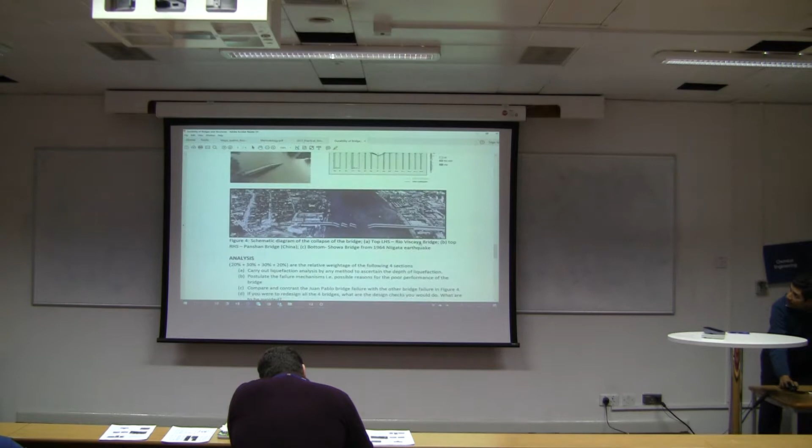So the figures are not very clear, isn't it? What I will do is try to project the figures so that you can read it on the screen. That is the coursework.

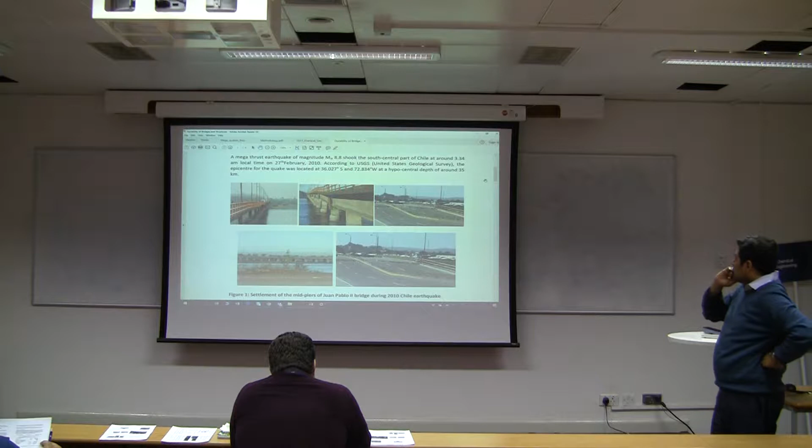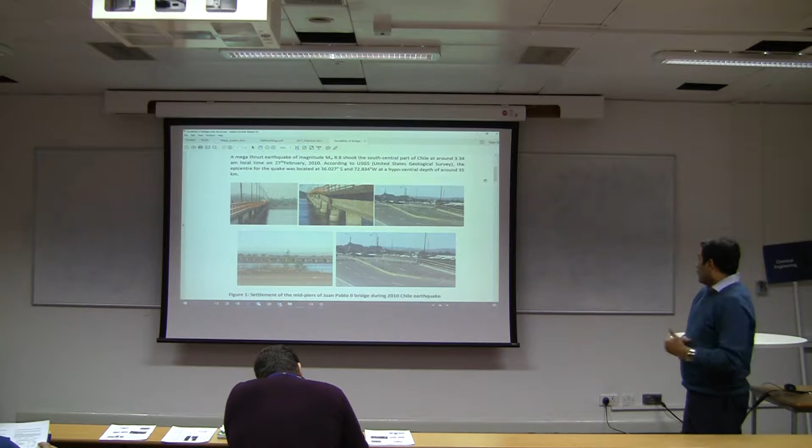Okay, so what you can see here is a bridge. What happened here? Anybody? So the bridge did not collapse, but in some places we had a big settlement. The bridge foundations settled differentially across the whole bridge. What that has done is, in some places, settled by even 1 meter or 0.8 meter.

So is the bridge workable? Of course not, but people can be careful and cross in some places—there's a walkway, it's not a complete collapse. There will be downtime, so the bridge is not operable. Probably it will take 6 months or 3 months, or in some places 2 weeks, depending on the insurance claim and how you procure things. But you can make it work in a relatively short time. You can close some lanes.

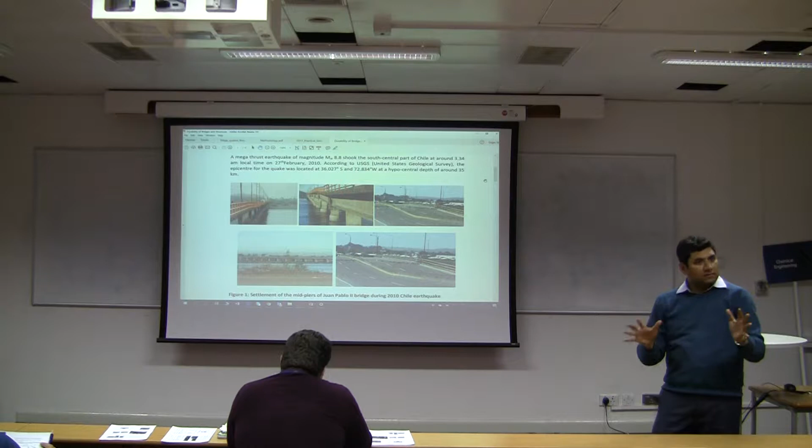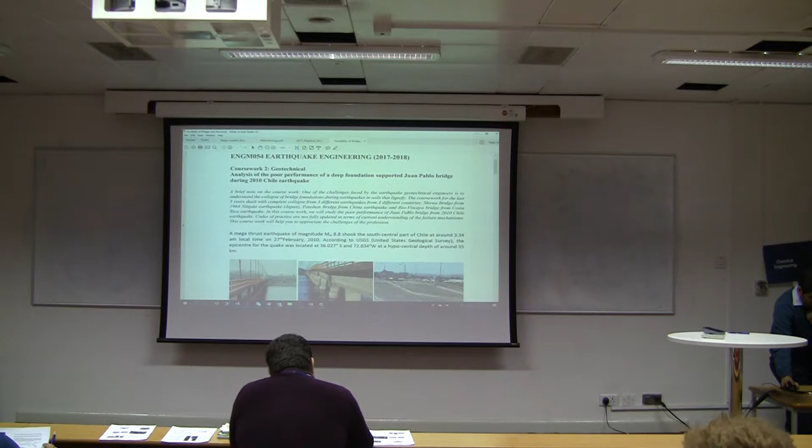This is from one earthquake. This is this year's coursework. But what I want you to do is look at the past 3 years—I gave other failures. They are given here, so you can see there are 3 bridges.

So in this case, will it work at all? Nothing—it can't even be walked through. And this will take a lot more time to get it sorted. They're all on deep foundations, some sort of pile foundation.

So the coursework is about what you should check. As a designer, when you're doing a design, you don't want either of these outcomes.

But in some cases, if you think the earthquake may not occur in the structure's lifetime—there's a very small chance—and if you want to implement all the mechanisms to prevent damage, it might be very expensive. So you might say, well, I will allow for a 1 or 2 week downtime, and allow some damage so that I can easily repair and bring it back.

Say, for example, to avoid this sort of failure it takes 1 million to do the whole bridge. But if you want no collapse plus no settlement—nothing, absolutely safe—it will cost say 4 million, an extra 3 million. But the chance that the earthquake may come in the structure's lifetime is only 5%. So would you spend 4 million, or spend 1 million and take the hit?

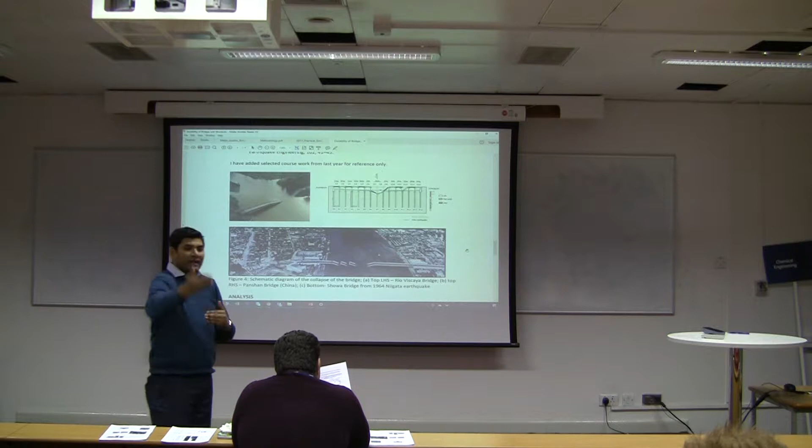And these are known as performance-based engineering—the new way of designing. So do you want a complete collapse, or do you want a certain amount of downtime, depending on things? You might say you don't mind losing the bridge if it fails, because the costs go up significantly to have all these protective things implemented.

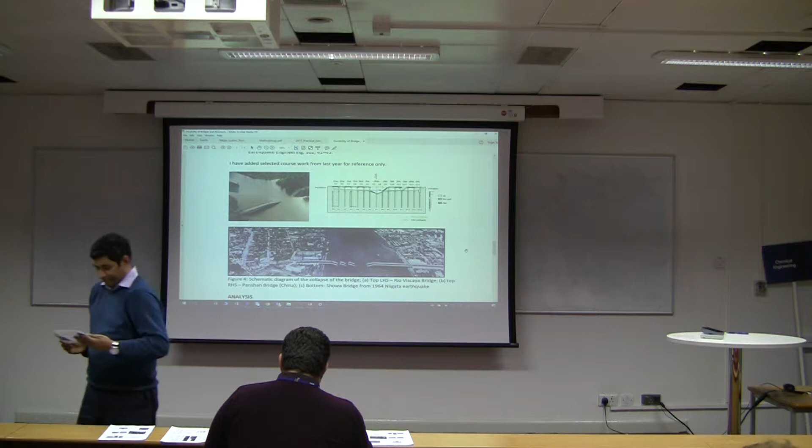Can I just ask quickly, with this layout of the question, to clarify: the liquefaction analysis is with the first case study, and then you're comparing it to the last case study? Is that in question C?

Question C, so is... okay, now what I want to do is give you sample coursework from last years, from the last 3 years, when they've done a good job. So what you can do is compare and contrast this failure with the other failure.

What I just said, we will look here at a complete collapse, and what mechanism governs these failures, and what mechanism is governing the bridge you analyzed. So we can summarize the previous courses given to us, and then compare that analysis.

So what I want, as a learning outcome, is for you to read about the failure, why it failed, for those 3 bridges. Read them, and take in the important things. Write down those mechanisms, and add another mechanism, which is this one. It's more about learning from these failures.

If you look into codes of practice, what do they do? Codes of practice assume engineers can miss out something, so they try to give a prescriptive way of how to do analysis. Often they miss out a mechanism, or don't give everything because it's not properly identified or documented. But these failures can show that even if you follow all the code of practice, why will it fail then?

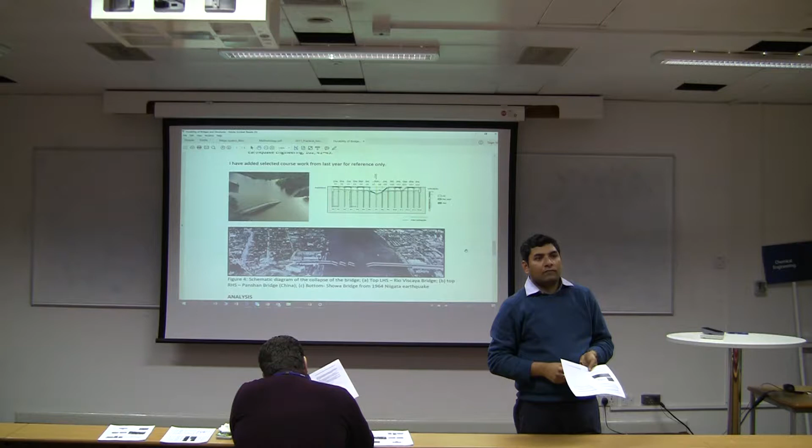Sorry, learn that your technical coursework due date is on the 24th. Is that on a Wednesday? Okay, there are 2 courses - the structure one is due the 1st of May, but the technical one is the 24th of April. Is it given on a Saturday?

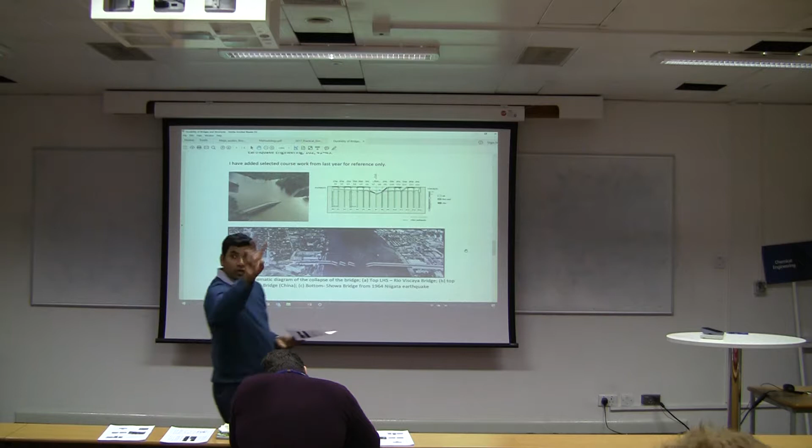Yes. Right, in that case, do we want to do both, or do we have to do both? I can change it... I can change the date to the first of May, or do you want to make it as long as you want? What do you want - change it to the first of May? Yeah, so both due the first of May, yeah? Is that okay?

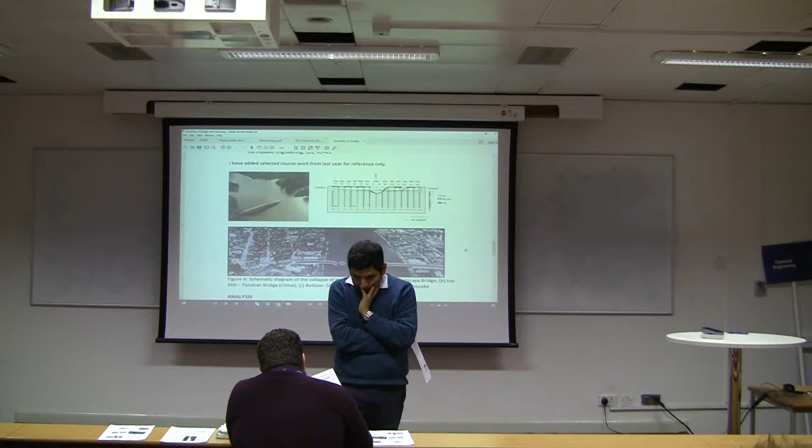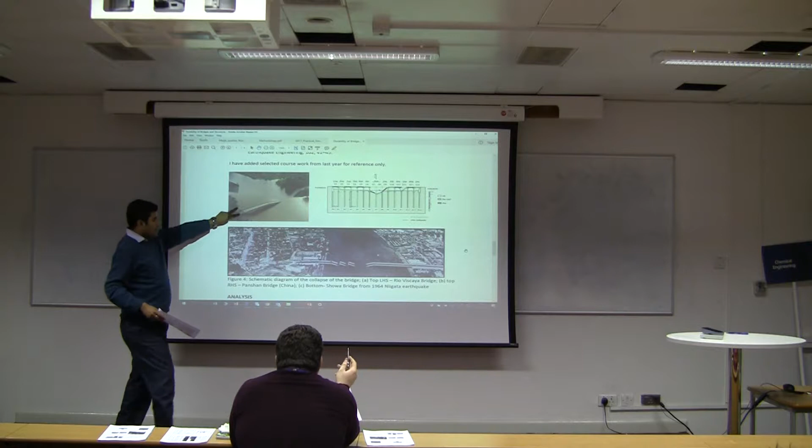Yeah, so there are 3 bridges. One is this one - Rio Vizcaya bridge. This is the Panshan bridge, and that one is the big public one. In terms of the deadline, I was thinking I'll leave it open, as long as it's in the future.

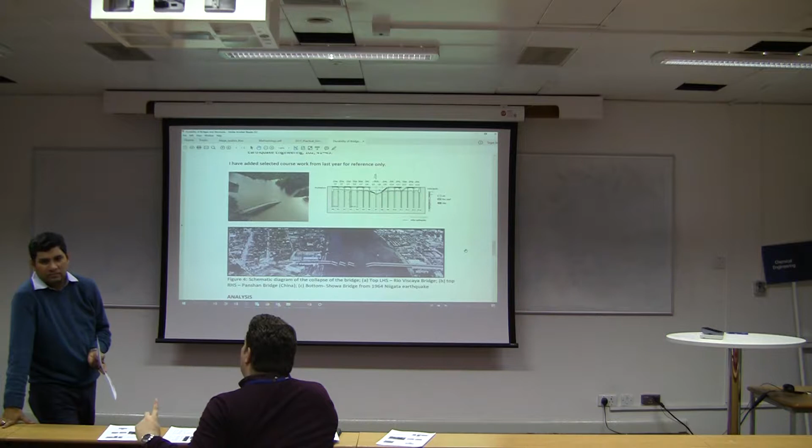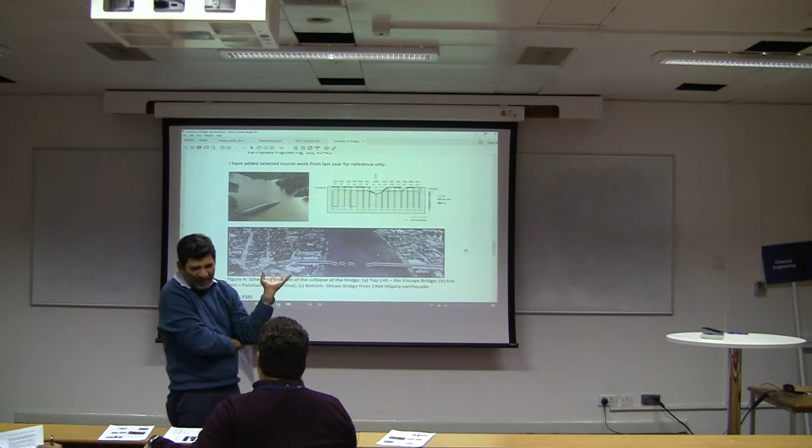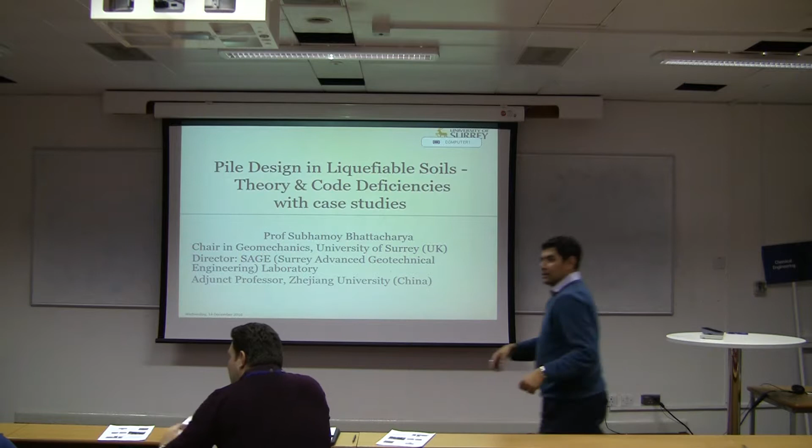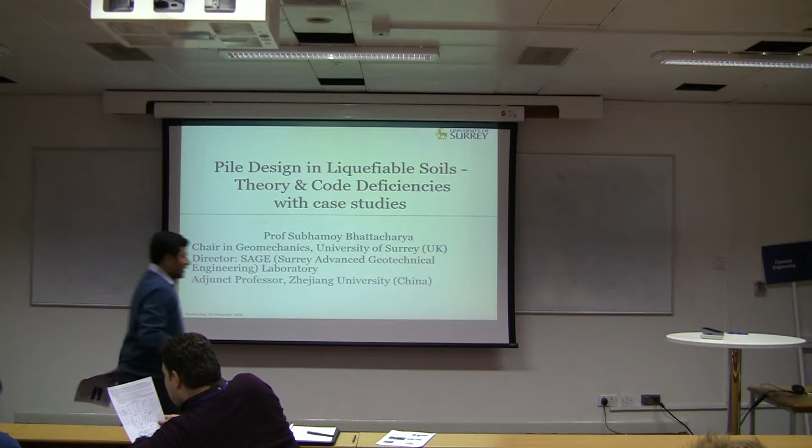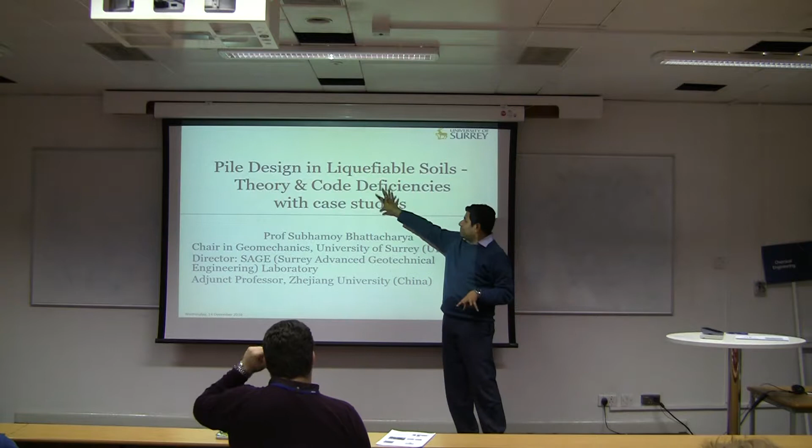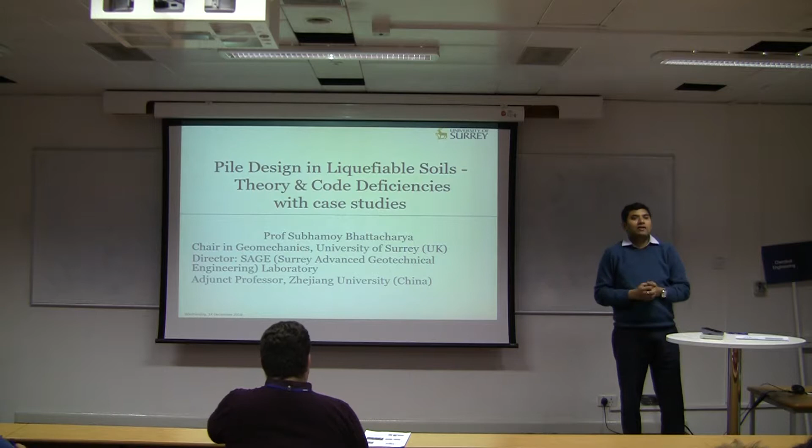You can see here the title, code deficiencies. What I am giving you as a hint is that codes are often deficient. Codes don't cover all the mechanisms, right? And that's the main point about this case study. You will see that the codes somehow couldn't cover this particular case, and engineers followed the procedure and they missed one particular mechanism.

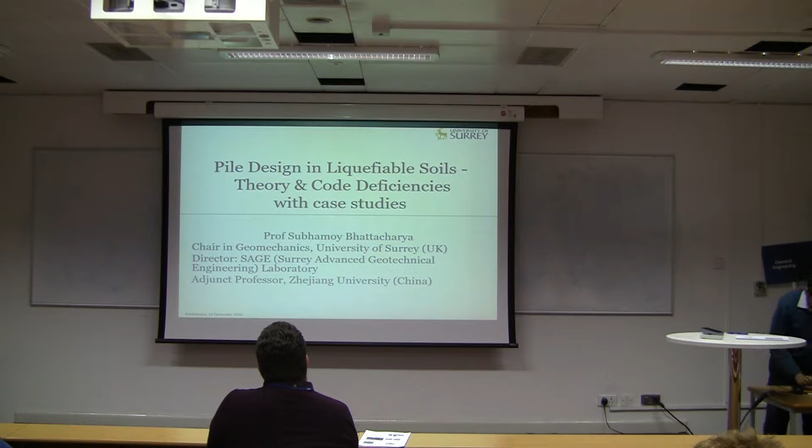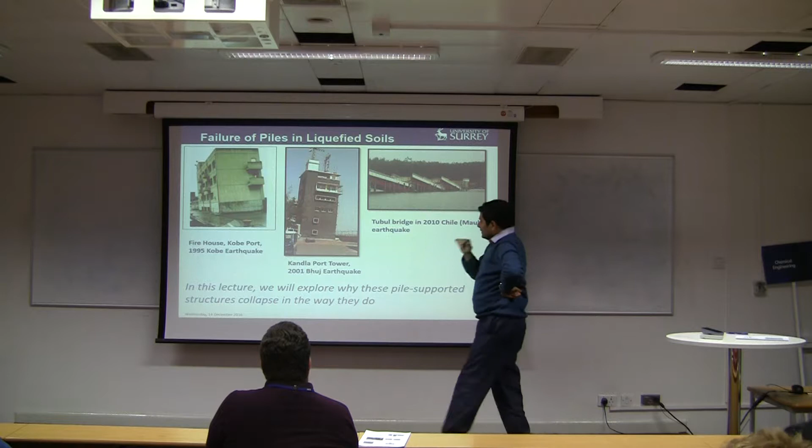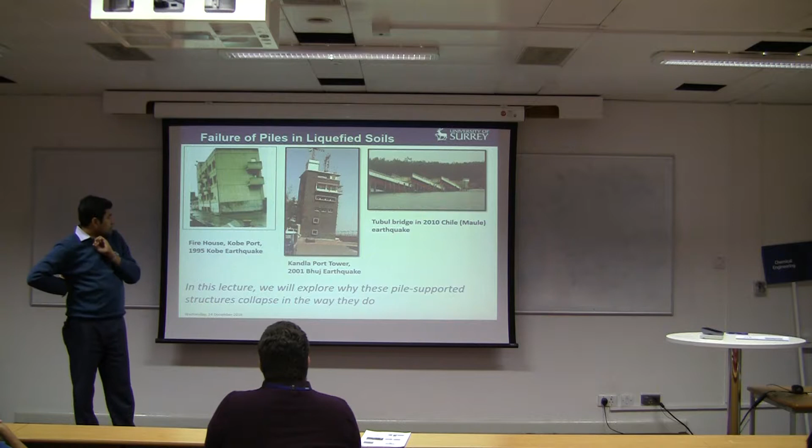Right, so here are some examples of pile failure. What you can see in this case, there is a pile-supported building. The building is intact in both cases, they are intact and pile-supported, and you can see what happened to this building. And here is a bridge on pile foundations. So why do things fail?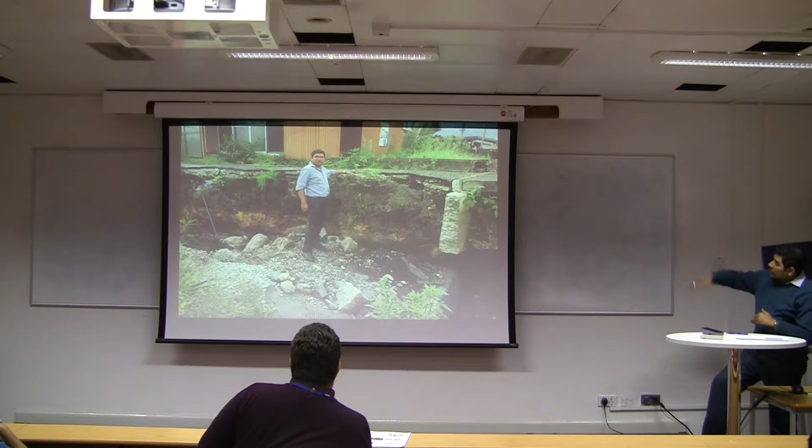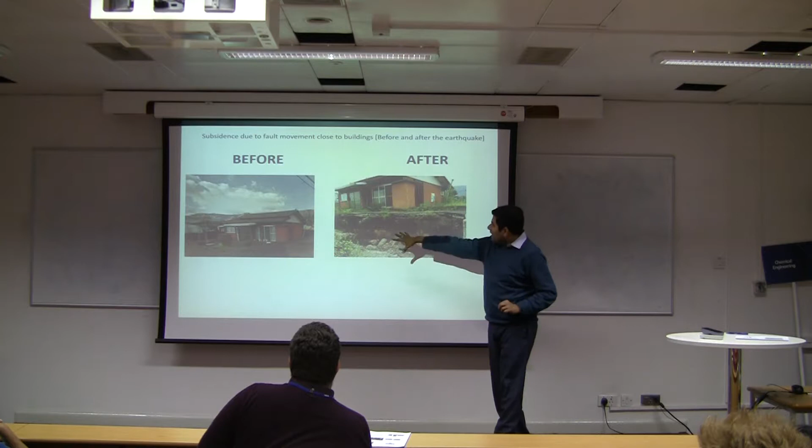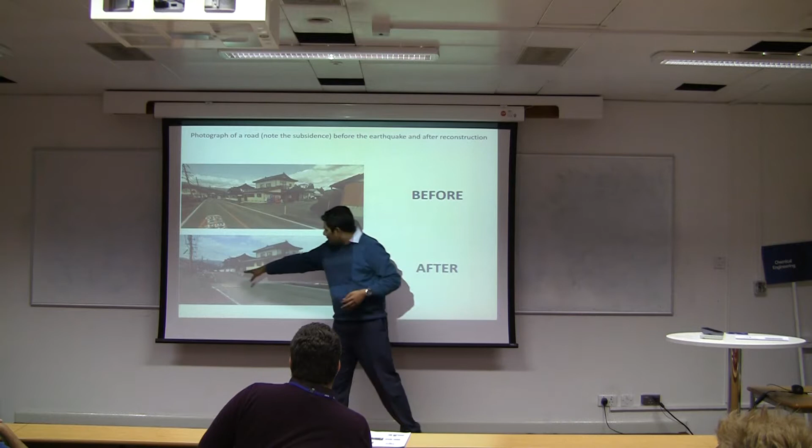Just to remind you, if you have a fault rupture, you can get a big sort of settlement, big ground movement. So this building, what you can see in the second picture, this building narrowly escaped, and the road had a similar fate. But what they did, they put a ramp there and started to operate, because you've got to start the communication, right?

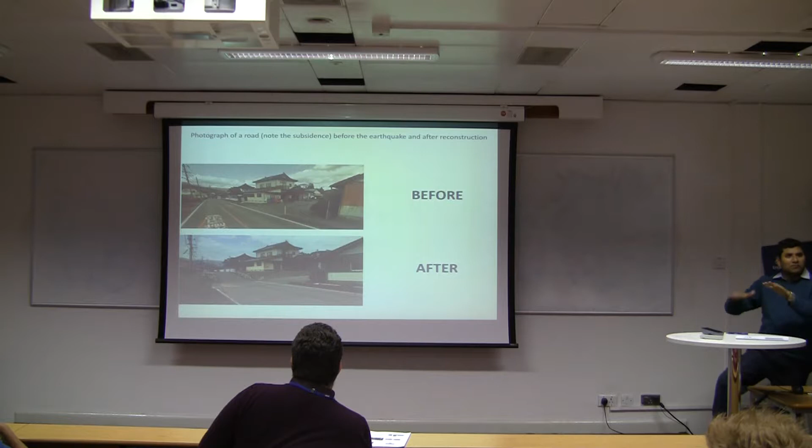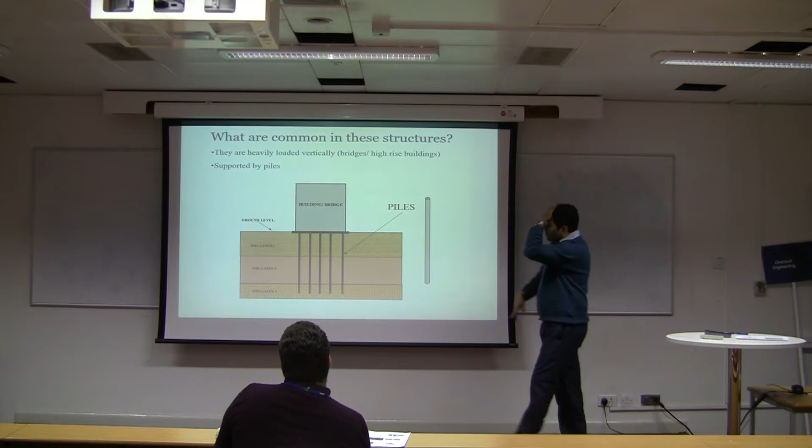So this coursework is something around these lines. You can have some movement and that can cause some difficulties. Now, the problem I was showing you before is all those structures are supported on pile foundations. And what are piles? For those of you who are not geotechnical, piles are basically long slender columns. You put them into the ground so that the load transfers to a deeper competent layer. So if I, for example, put the building on top of this layer, it may have been fine, but actually you may have settlement, tilting. But you found out that here's a very good competent layer, so you put the pile to take the load to deeper layers.

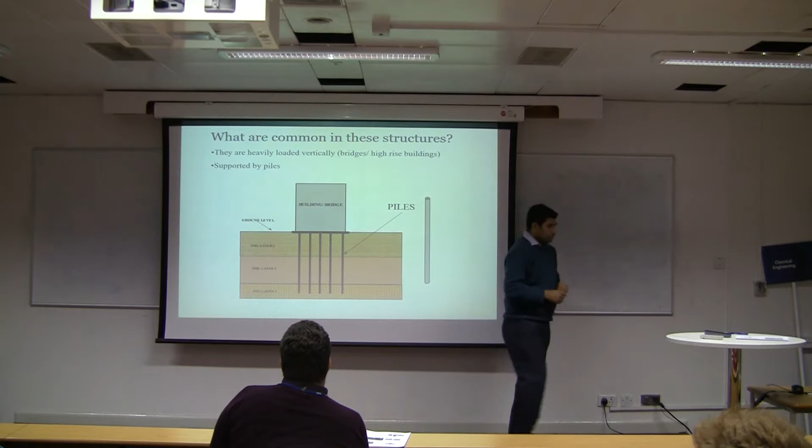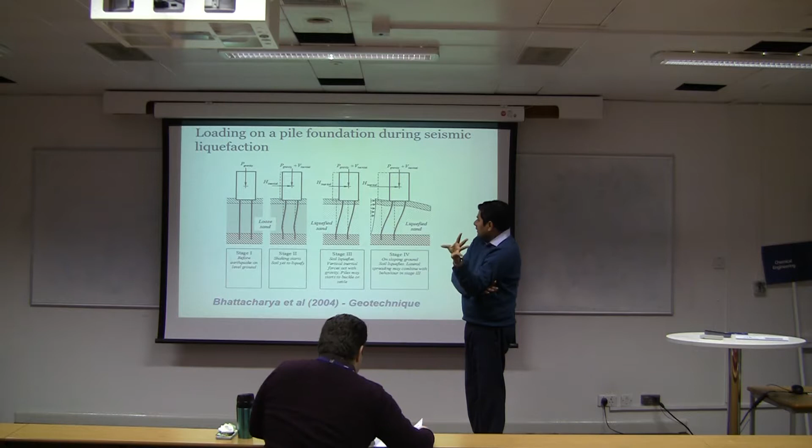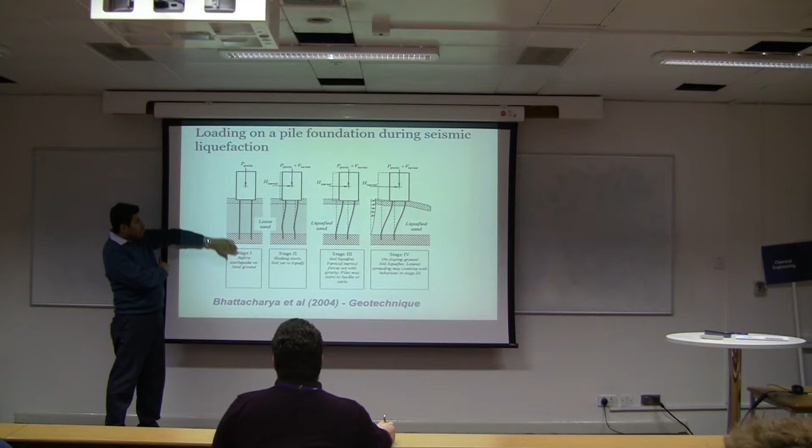Now, what happens in an earthquake? Say the earthquake starts. So if we look into a stage where there is no earthquake, the vertical load is balanced by the reaction in the pile support. So the piles are taking the whole building load. In a very simple sense, if you know the vertical load of the whole building, and if you know the number of piles, you roughly get the vertical load on each pile.

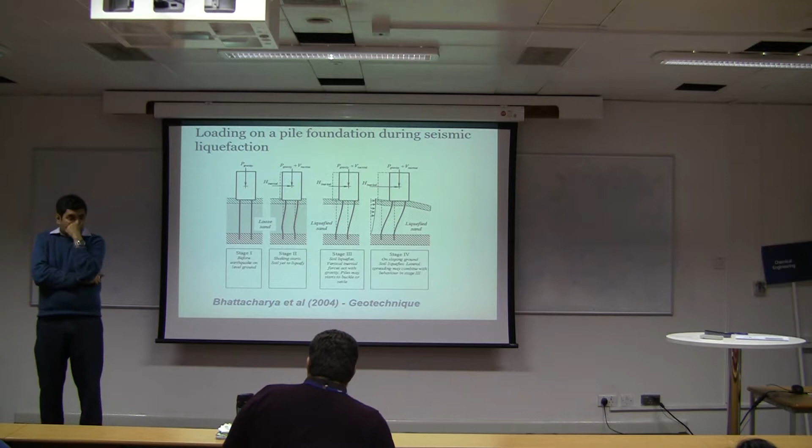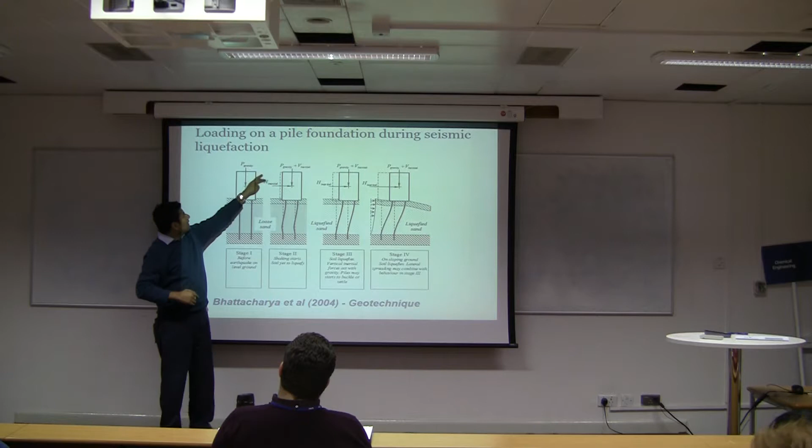However, when the earthquake starts, what happens? As the earthquake starts, the whole ground starts to shake. As the whole ground starts to shake, the building also starts shaking. And in that case, what happens? The building wants to rock, because the building vibrates. As the building vibrates, it then rocks. It applies more vertical load on the pile, that is P gravity plus V inertia. So vertical load due to inertia, that comes due to building inertia, because the building wants to vibrate. As the building wants to vibrate, it will be like a moment, and that moment is taken by the pile.

Just to give you a simple estimate, how can you find out the extra vertical load on the piles? Any idea? You have done response spectra, haven't you? Stefan told me he has already taught response spectra. So how can you apply it? Do you get the response spectrum to give you the displacement of the ground at that point, and then use that maximum displacement?

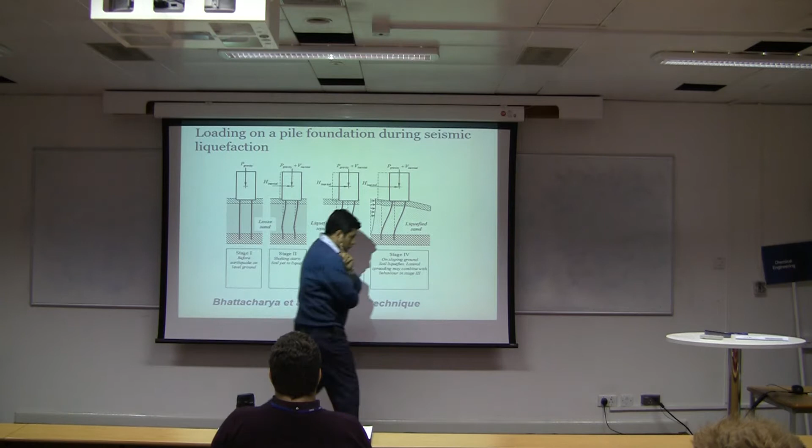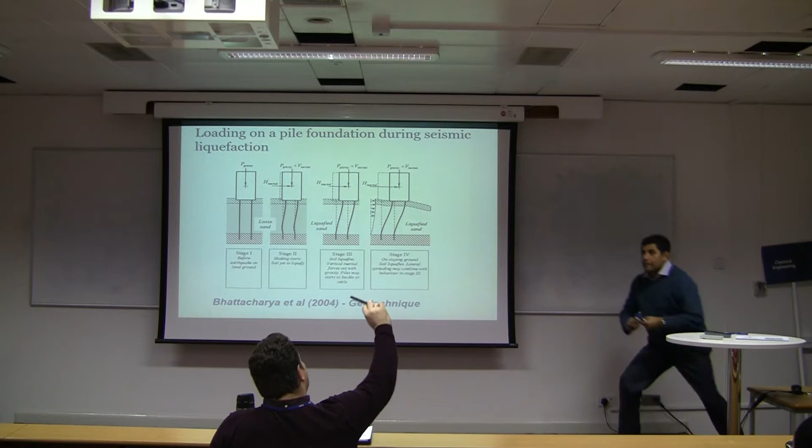Right, let us go back and see what a response spectra plot shows. What do we plot with the response spectra? You need to take the forces due to the masses, yes, and calculate the moment on the base of the building. Yes, that's right. So what are the response spectra plot, what are these axes? This is... that's time.

What about this axis? That's time - time period. What does time period mean? Period of building - it's basically the natural frequency. This is the building's natural period.

If you give a small movement, a perturbation, it will swing on its own - what is that frequency? And what is that axis? Acceleration due to gravity - spectral acceleration, SA.

Every code gives you these graphs, and they actually look something like that. So all codes give you this, and this spectrum depends on the type of ground - hard soil, soft soil, whatever type of soil it is, you get a graph like that.

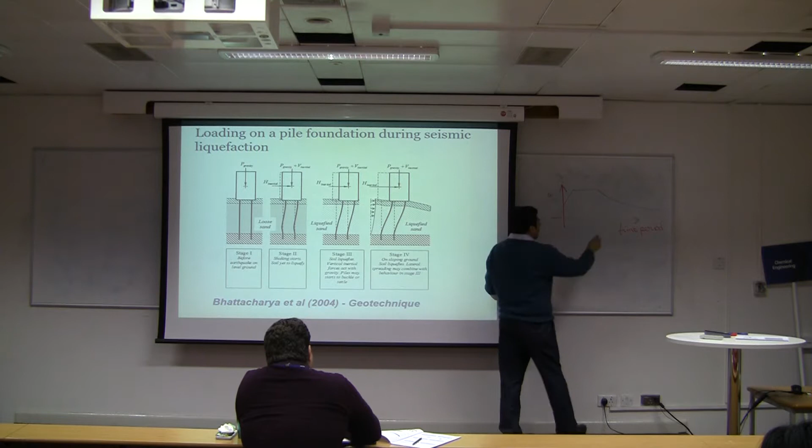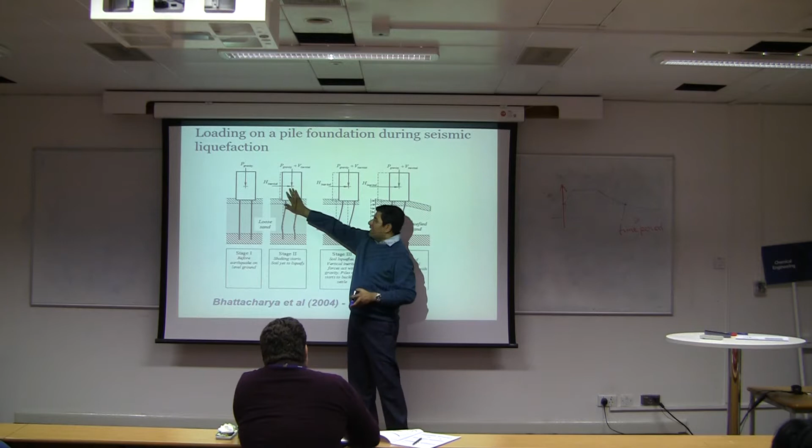So what it shows is, if you know the building's time period, you can get one point from here, and if you read off this, it will give you the building's spectral acceleration. Say for example this building has a period of 0.5 second - you come up here, 0.5 second, for the particular ground it's founded on, work out the acceleration. Suppose you get 0.2g or 0.3g - that's the acceleration. You know the building mass, multiply by that loosely and it will give you the inertia.

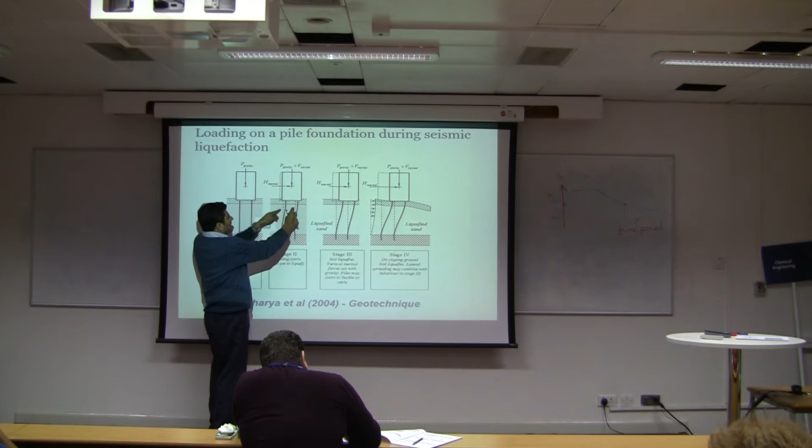Once you know the inertial load, you can find out the moment there - it's a push-pull action. So that moment divided by the lever arm spacing will be the force on each pile. That's the extra force coming onto your pile, the vertical load coming due to the rocking motion.

So that's why we say P gravity is always there - gravity is always there, there's the building's dead load, can be a bridge's dead load. You have the extra vertical load coming due to rocking motion - that's the inertia effect.

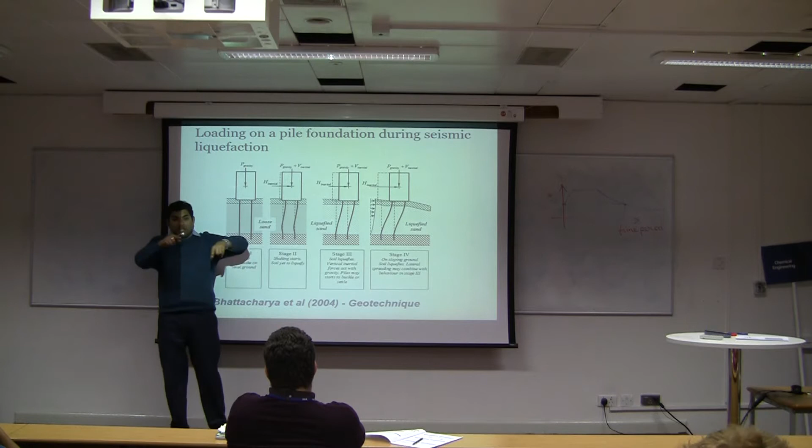When it occurs, it starts to occur immediately, as the earthquake starts, and depending on the earthquake this thing will change - so that's not a fixed number, it changes as the earthquake progresses. What does the ground do in that period? It starts to liquefy - in soil that can liquefy, it will liquefy, and gradually go down and down.

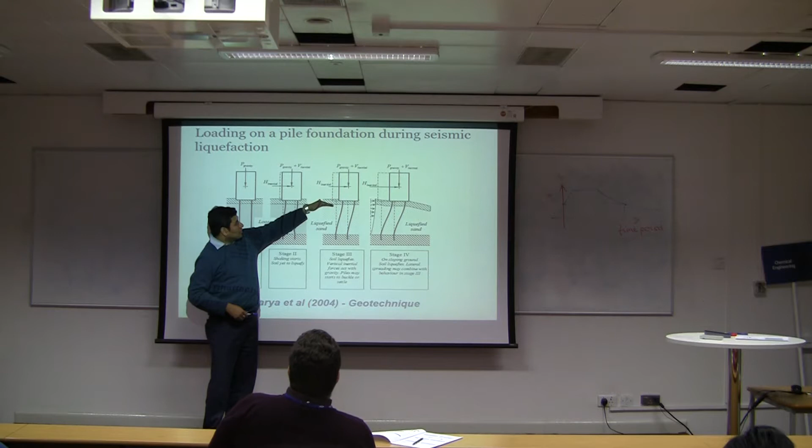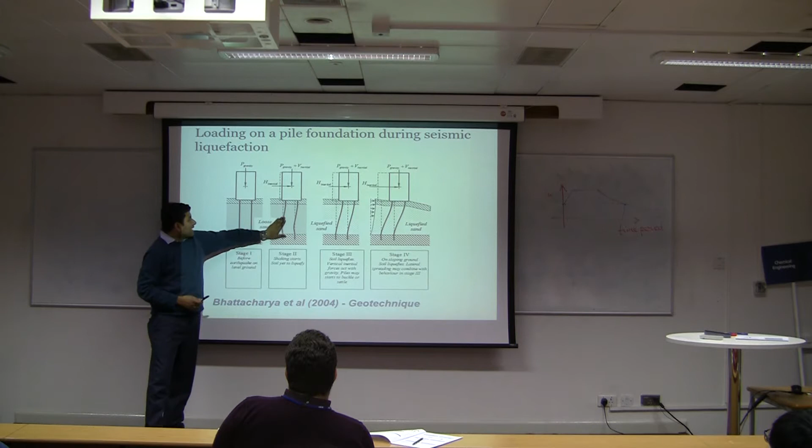As it liquefies, the pile is no longer stiff. In this case, the pile was surrounded by a heavy, strong material - a strong sand grabbing it. But as the soil is liquefying, the pile simply becomes like a normal column.

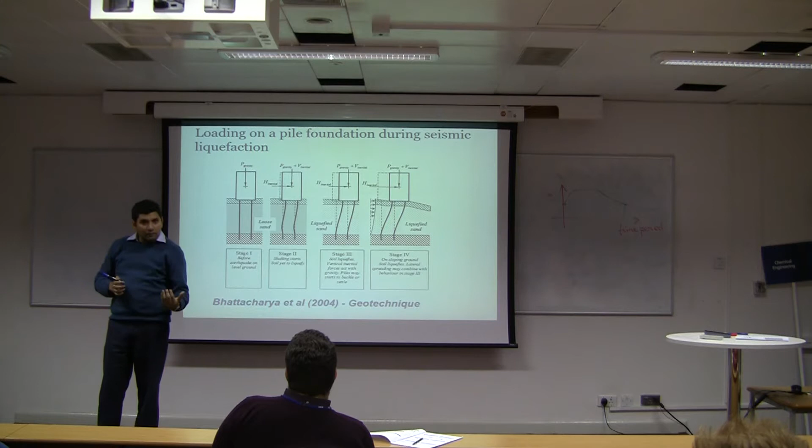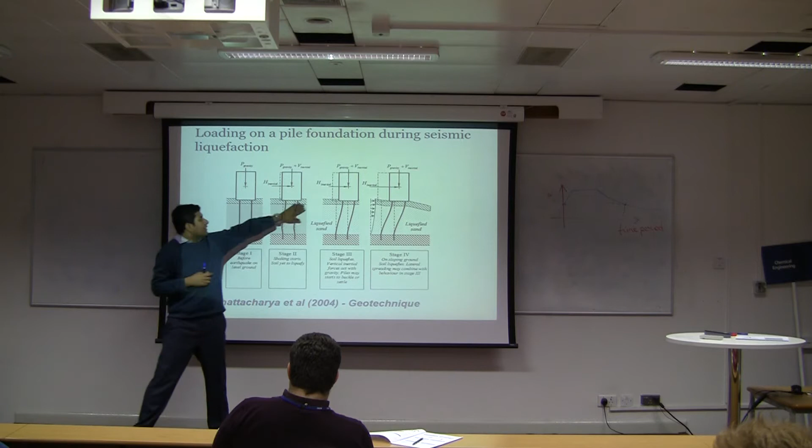What you might find is that near a river, the soil liquefies. What will stop it from flowing? Nothing - it starts to flow. The ground will start to flow, and as the ground starts to flow, it starts to apply more lateral load.

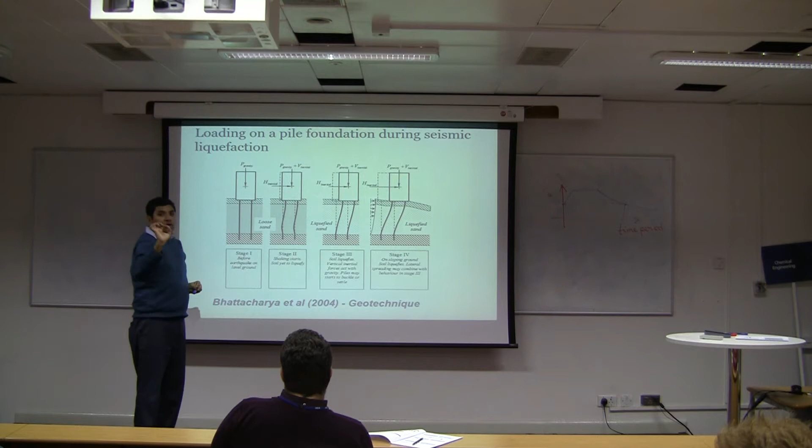So if you were a designer, what would you check for? All these mechanisms. To start with, if you find the ground will not liquefy, you can forget these two mechanisms - you only worry about this one. And if it liquefies, you can start to worry about what happens here and there. So one of the important things is to work out whether the ground will liquefy, and if it liquefies, to what depth, and then account for all these mechanisms.

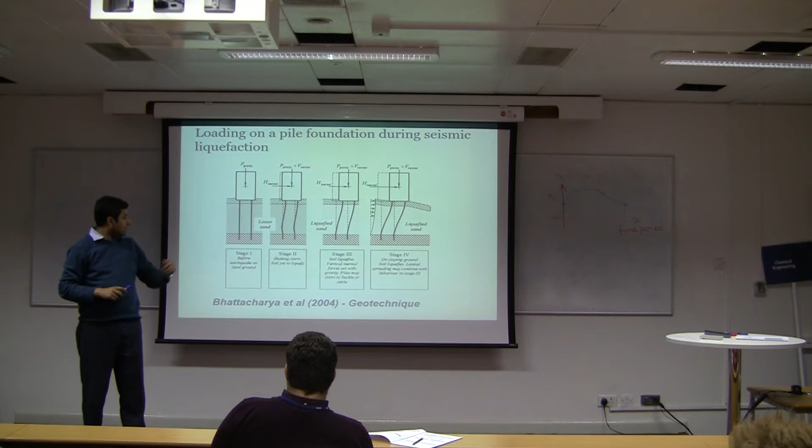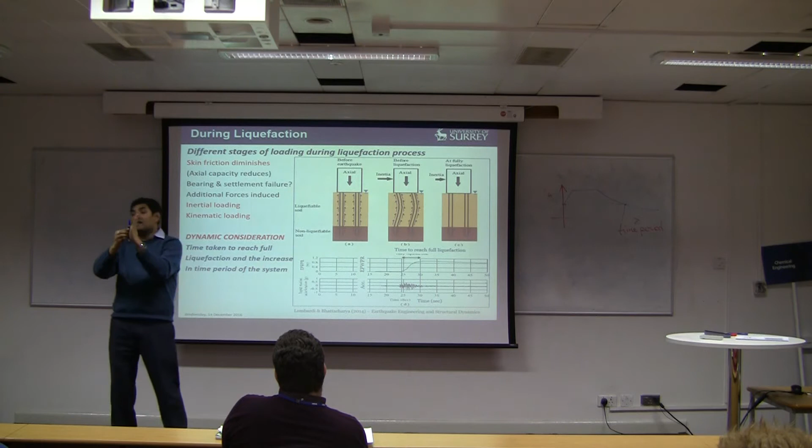There's a bit more complexity also on that as well. Here is the pile, and as you apply a vertical load, each pile will have the load transferred to the soil by two mechanisms - friction and end bearing. The friction is the friction on the pile skin, so the shaft resistance, and this shaft resistance is a function of vertical effective stress.

Those who are doing foundations have already done this, but for the rest I will explain this particular mechanism. If you have a pile and it goes down to that depth, the pile will have a load - that's ground level. The load is being taken by end bearing and friction on the side.

Now, how do I calculate the friction resistance? Say, for example, I am looking into only this particular element at this point. You can easily compute the vertical stress, sigma V dash.

Then you can calculate the lateral stress by multiplying by the earth pressure coefficient, and then compute the friction by multiplying this by the angle of friction of the pile and the soil. So friction is given by K times sigma V dash times tan delta, and then you take the area of the circumference. So the main thing is that the friction is a function of sigma V dash, the vertical effective stress.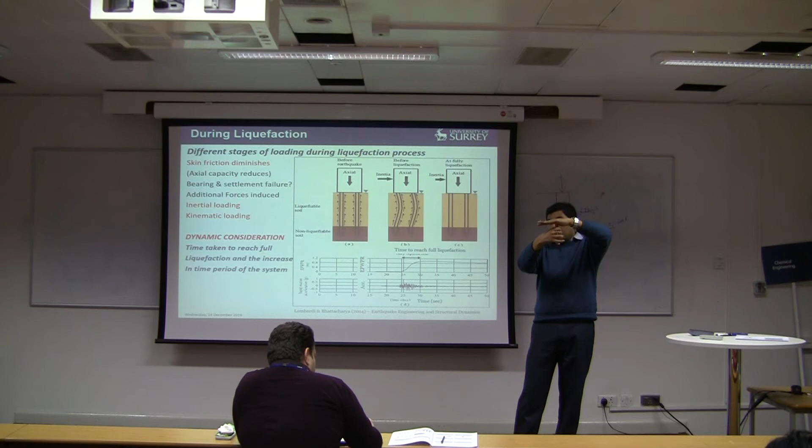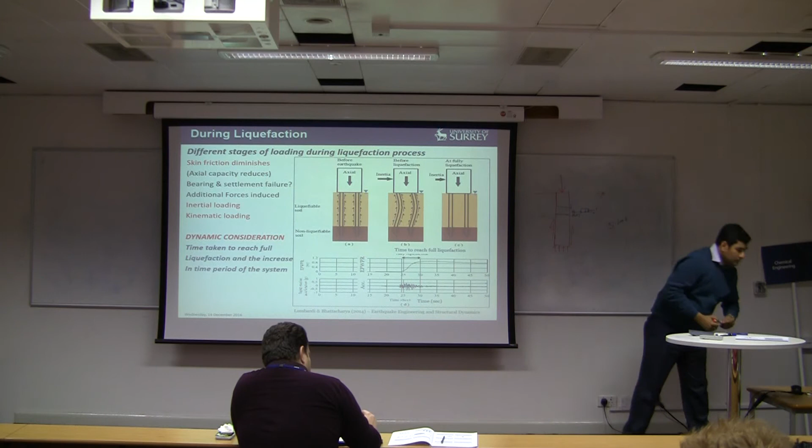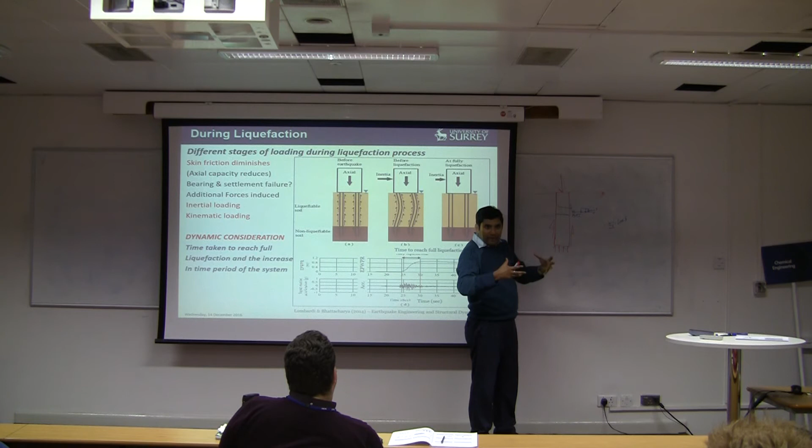So, as it liquefies, the skin friction will diminish, then the axial capacity will reduce. Because the axial capacity of a pile means how much load it can carry, and this will reduce because you are losing part of the shaft capacity in the layer that liquefies.

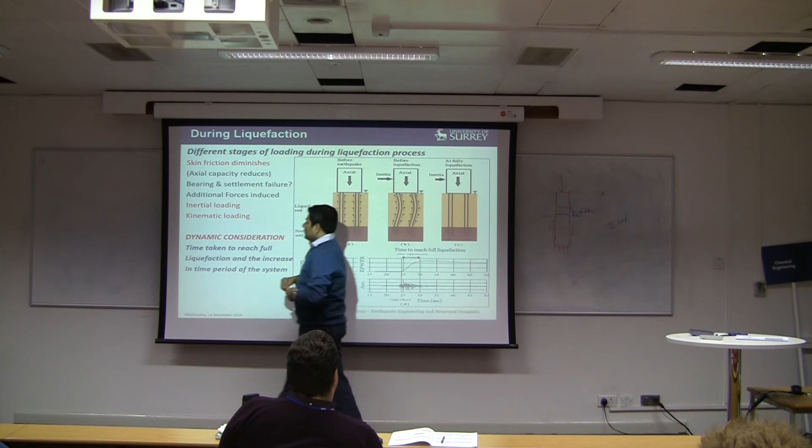So this may lead to bearing capacity failure or settlement failure. Bearing failure means that suppose the pile ends in the liquefiable layer, so it didn't go beyond the liquefiable layer. So what will happen? You will simply sink. Nothing to stop it, isn't it? That's what it is.

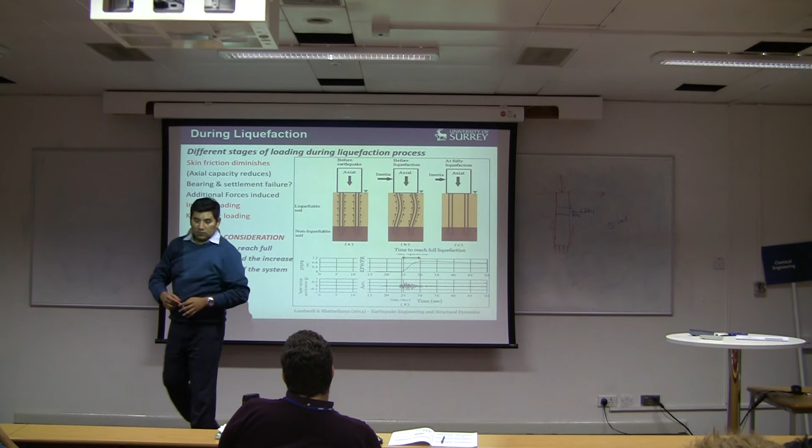Okay, now another interesting thing is, let's consider the building period for this condition. In this particular condition, you have the building, the pile, and the soil intact, and the foundation. So the building period is normally dependent only on the building characteristics.

So what does it consider? It considers only the building dimension, isn't it? Why is there nothing about ground or foundation? Does this formula distinguish if it is a shallow foundation or a deep foundation? Does it consider that?

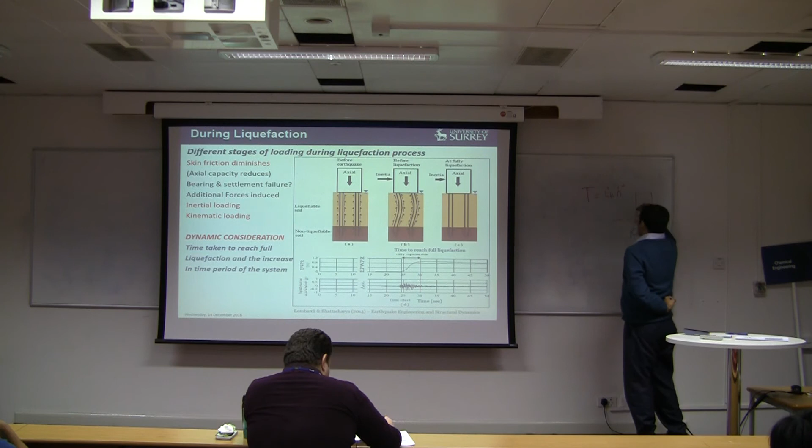What does it mean? It means it assumes this is very, very strong and rigid, and this is only flexible. So it assumes that the building is flexible compared to the foundation. The foundation is so rigid, it doesn't take part in the vibration. What it means is that the foundations are very rigid, so in that case the formula doesn't take into account anything to do with the foundation.

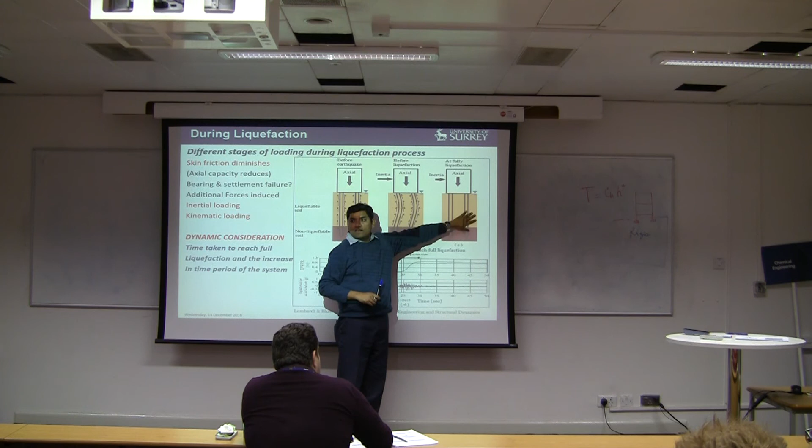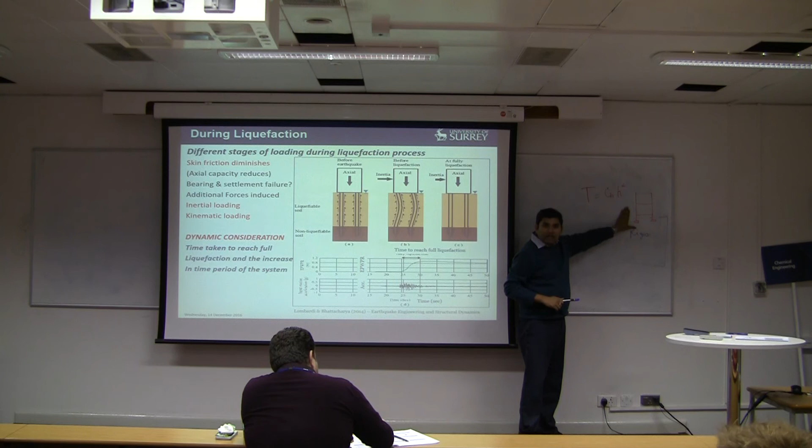However, when the soil liquefies, we have to take all these things into account. So this is a model at no liquefaction. But when soil liquefies, the same model will become different, say if it is a pile foundation and that's the depth of liquefaction, to what depth it liquefies. So the pile then starts to become, the model becomes like this, you have got an extra part there, and the model becomes like that.

In effect, what it's showing, just as an example, say you found out that the building period is 0.5 seconds. When it liquefies, it will become a bit slower, say 3 seconds, 4 seconds. The time period will increase, so the foundation becomes more flexible.

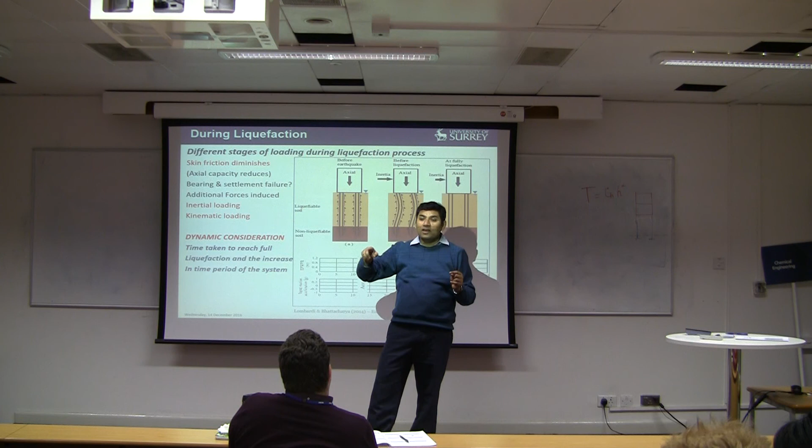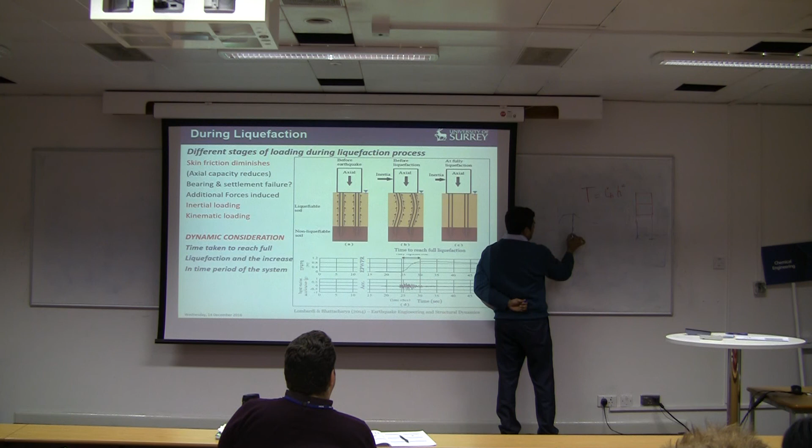How does it impact your design? Remember, you were using response spectra for doing the force calculations. So you are taking the building period, which was 0.5 seconds. When it liquefies, the building becomes more flexible and goes to 3 seconds. So then again go back and check in the response spectra where it is going. So you were somewhere here, and as it liquefies, say this is 0.5 seconds, it goes to say 3 seconds.